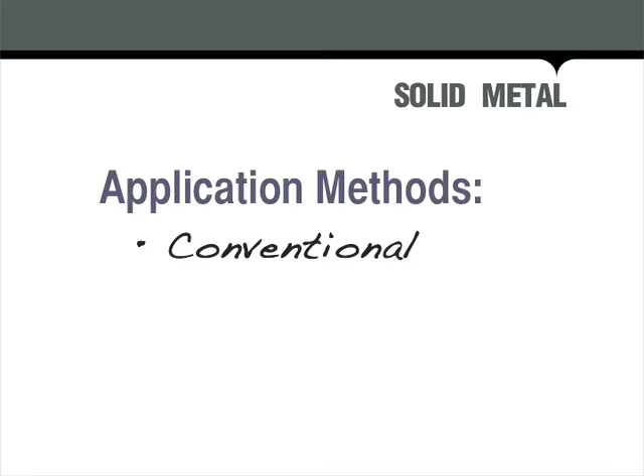Solid metal from Scuffmaster is a spray-applied finish made up of two components, Metallic Coat 2000 and Ultra Clear Protective Clear Coat. To achieve its elegant finish, solid metal must be sprayed using conventional, HVLP, or an HVLP gun attached to a pressure pot and compressor, a system often referred to as a hybrid system. Solid metal cannot be applied using airless equipment.

For this video, we will be using the conventional setup. Instructions for HVLP and hybrid applications can be found on our website, scuffmaster.com. Please note that while the equipment may change, the application technique will be the same.

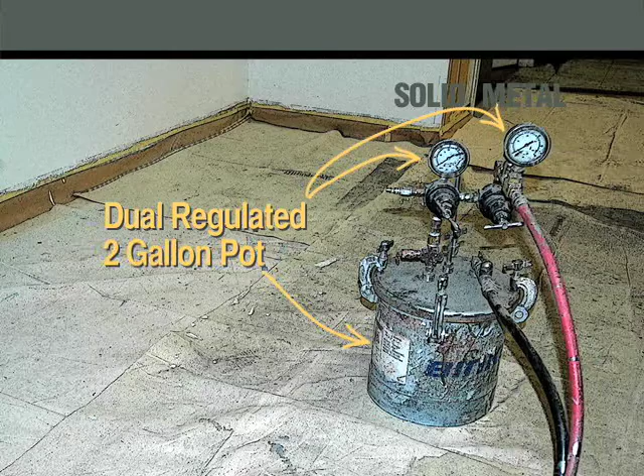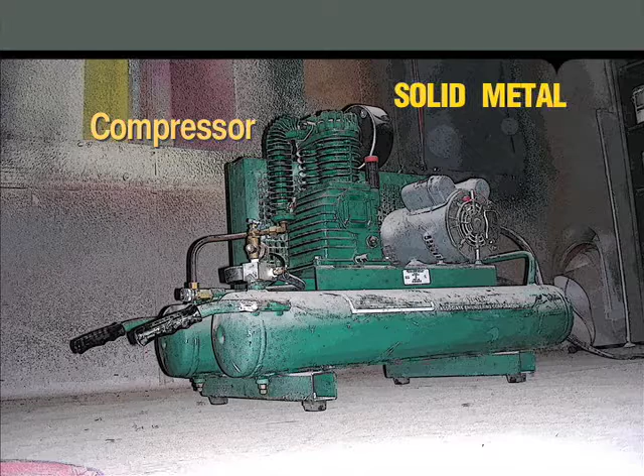For the conventional application, you will need a dual-regulated 2-gallon pressure pot, a Binks 2001 spray gun with 66 SS fluid nozzle and 565 needle, 63 PB external mix air cap. Another option is the 66 SK. A compressor that will provide at least 6 cubic feet per minute at 90 psi.

In your shipment, you will receive the two paint components, the MC2000 and the UC Protective Clear Coat. The clear coat comes in 3 sheens: flat, satin, and gloss. The most common sheen is satin. In addition, each gallon of metallic and each gallon of clear coat will come with a catalyst called MasterLink. MasterLink is a performance additive that is mixed into the paint just before application.

A word of warning: once the MasterLink has been thoroughly mixed into the paint, it has a shelf life of 36 hours in the can, but only 8 hours under pressure. Make sure you only catalyze the paint that will be sprayed that day.

Before the painting begins, examine the surface. You want a white primed, smooth surface using either Scuffmaster Primer Sealer or our bonding primer. Please refer to the product specs for proper usage. Since solid metal is a reflective finish, the surface needs to be as smooth as possible. On new sheetrock, a level 5 finish should be specified. Be aware that any and all imperfections in the substrate will telegraph through to the final finish.

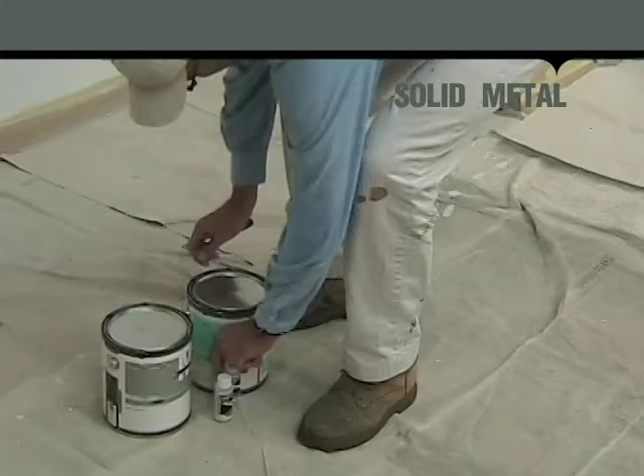The goal of this video is to make spraying solid metal as easy as possible. That starts with the proper setup. Scuffmaster finishes are made to order. This means they should be ready to go straight from the can without thinning. If, however, the metallic paint seems too thick, it may be thinned with water. Use the empty 2-ounce MasterLink bottle as a measuring cup. To avoid over-thinning, do not add more than 2 ounces of water at a time, and do not add more than 8 ounces per gallon total.

Add the MasterLink and mix thoroughly. This shouldn't take more than 30 to 45 seconds. Once the MC2000 is thoroughly mixed, use a nylon strainer bag to strain the paint into the pressure pot. This helps prevent the gun from getting clogged.

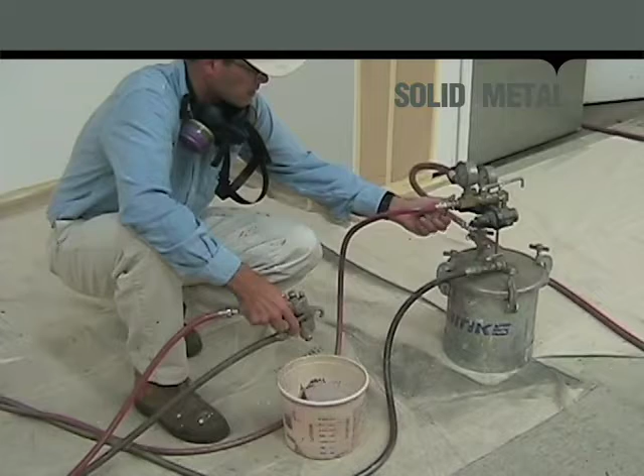Remove the air cap from the tip of the gun. Set the air and fluid pressure on the pressure pot to 0. Trigger the gun and dial up the fluid pressure. Increase fluid pressure until the paint streams approximately 4 inches before arching.

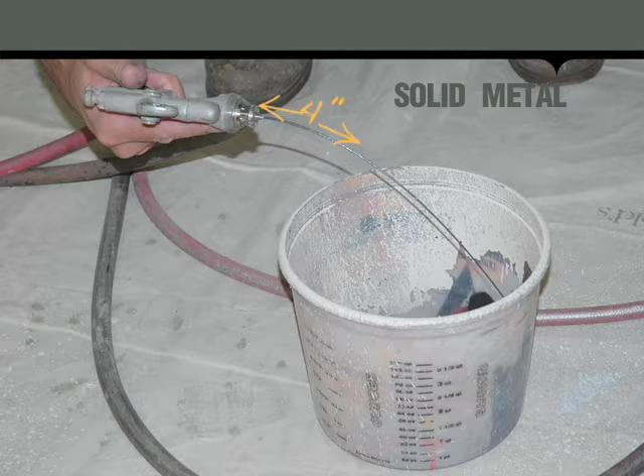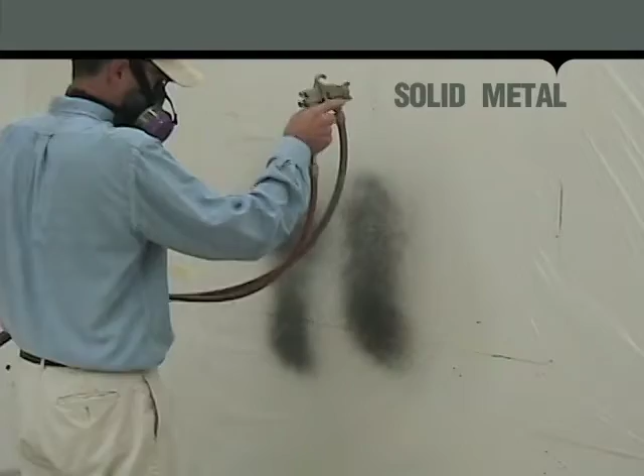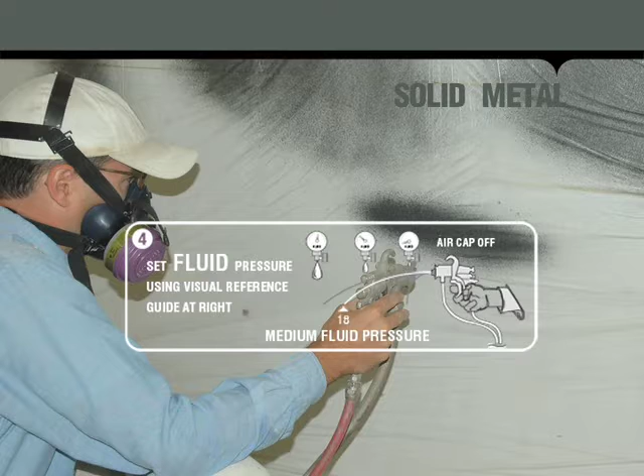Reattach the air cap. Slowly increase the air pressure until the proper spray fan size is achieved. With the tip of the gun approximately 10 to 12 inches from the surface, the spray fan should be about 10 to 12 inches wide. Make sure the fan is slightly under-atomized. By setting the pressures this way, you are using the minimum amount of air pressure to achieve the desired finish. Because factors such as temperature, color of the paint, and condition of the equipment can alter the pressure settings, this method will ensure fast and easy setup every time.

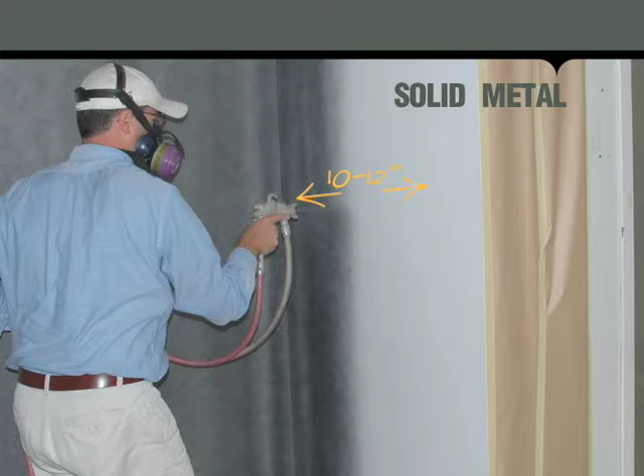The proper spray technique combines three components: the distance from the wall, the amount of overlap from one stroke to the next, and the speed of the spray stroke. Begin with distance from the wall. This will determine the overlap and the speed of the spray stroke. Hold the gun about 10 to 12 inches from the wall. If the tip is closer to the wall, you will need to use a tighter overlap and a faster spray stroke to compensate. Next, the overlap of each spray stroke should cover at least 50% of the previous stroke.

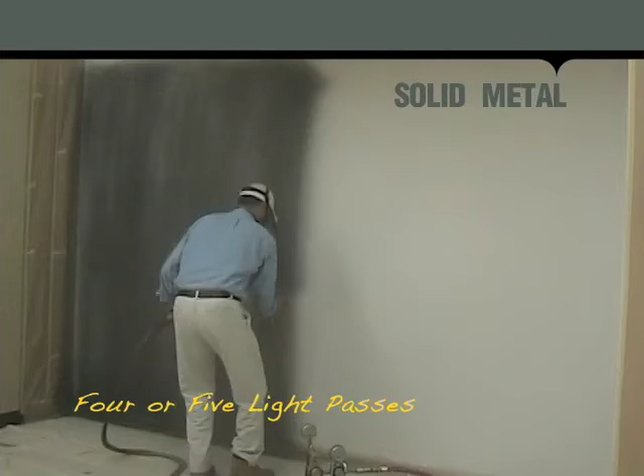Last, the speed of the spray stroke will determine how fast the finish will fill in. Avoid spraying too slow. This will result in a wet edge and will lead to striping. The fastest way to spray solid metal is to apply the MC2000 in 4 or 5 light passes. This may seem like more work, but light passes are applied more evenly and the finish will dry faster. This means a shorter amount of time between passes, and it usually means a better quality finish that requires less time spent fixing application issues later on.

Ready? Okay, let's do it.

First pass. The primer will still be visible. The finish may look cloudy or striped. Second pass. Follow the same vertical pass as the first. Ignore any striping, don't worry about trying to fix it at this point. Maintain the proper speed. Third pass.

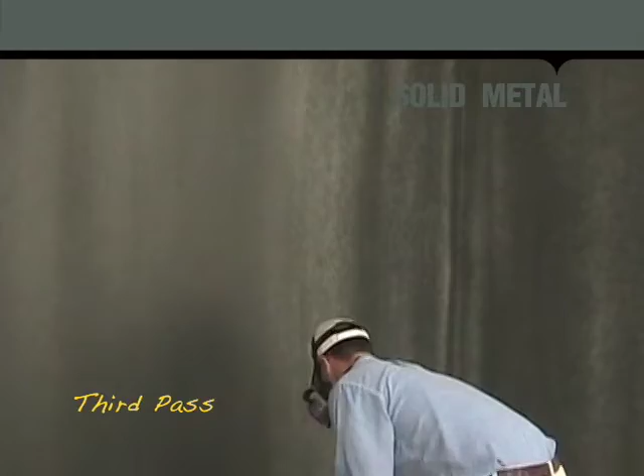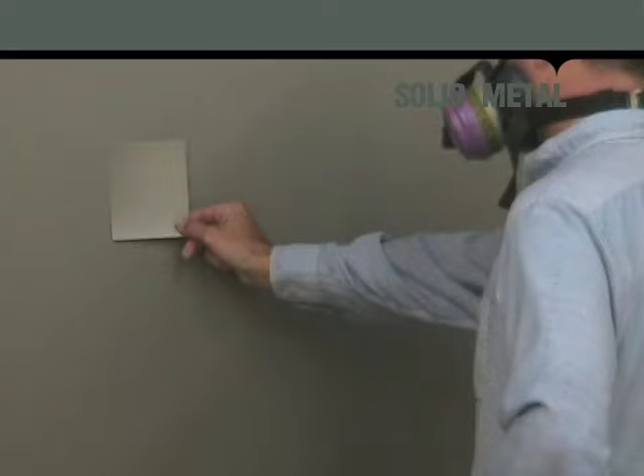The finish will begin to fill in at this point, although there still may be some striping and cloudiness, and some of the primer might still show through. Stop after the third pass to examine the finish from a couple different angles. At this point, the finish should look the same, regardless of the angle. Fourth pass. Use the same technique to finish. Fifth pass. Apply a fifth pass only when needed to provide a uniform finish.

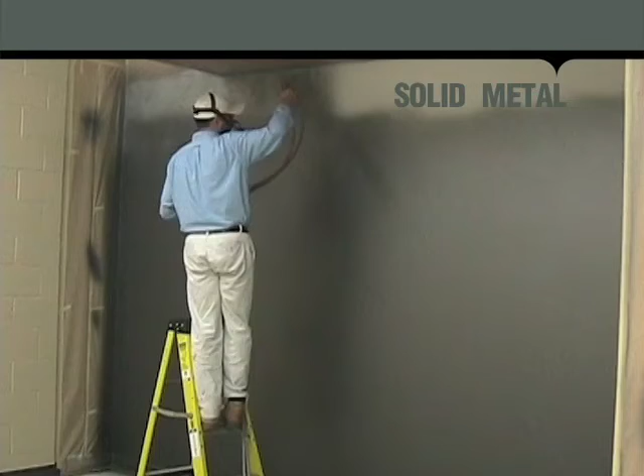It is important to work only within your reach. This means you might have to go back and fill in areas. Do this after completing the initial 4 to 5 passes. Again, 4 to 5 passes, fill in until complete. Before cleaning the equipment, check the surface from multiple angles to determine if the finish is indeed complete. If it looks good from one angle, but not another, it is not done and will need additional light passes.

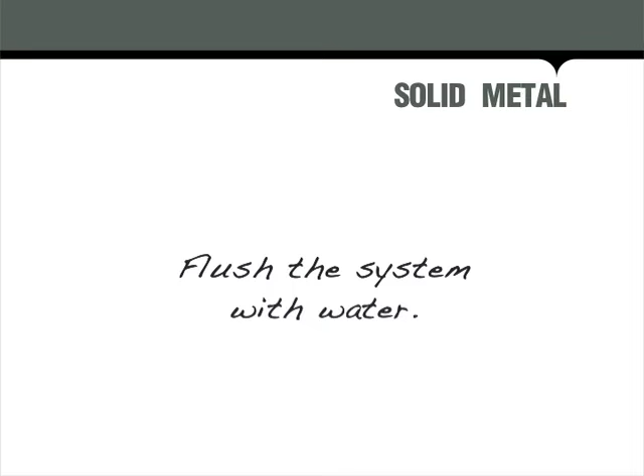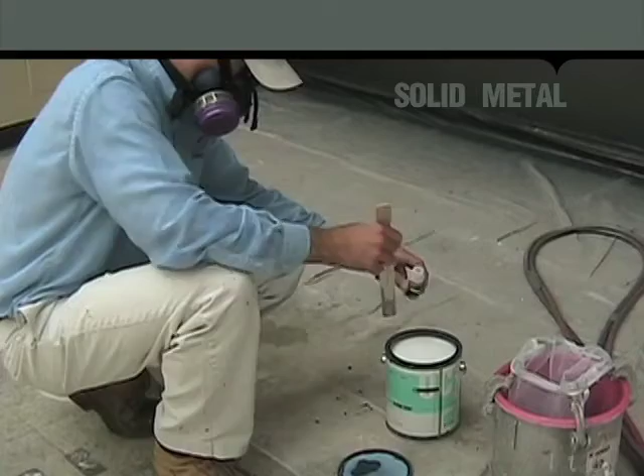Clean the equipment with water as soon as the metallic step is complete. Make sure the system is rinsed clean before proceeding to the next step. Next is the Ultra Clear Clear Coat. Add MasterLink just prior to application. Strain the clear coat into the pressure pot.

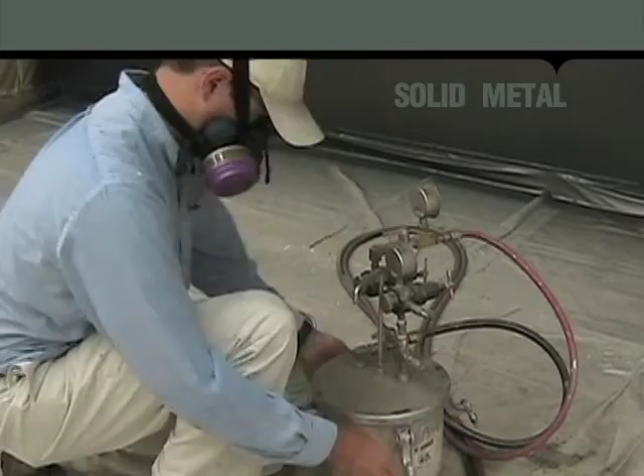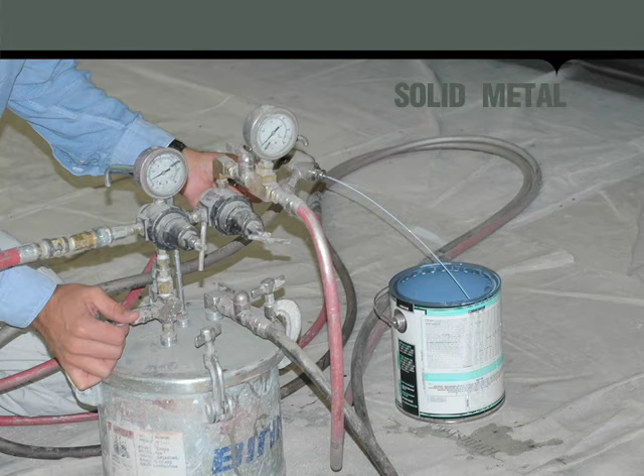Use the same technique of setting air and fluid pressure as you did for the metallic base coat. Once a 3 to 4 inch stream of clear coat is achieved, add air pressure until it is slightly underatomized. Unlike the metallic coat, spray the clear coat in one pass. Maintain a 50% overlap and a wet edge. The clear coat will go on milky, but it'll dry clear.

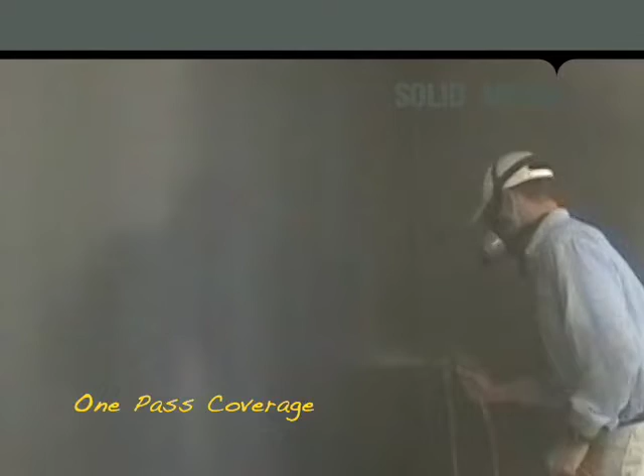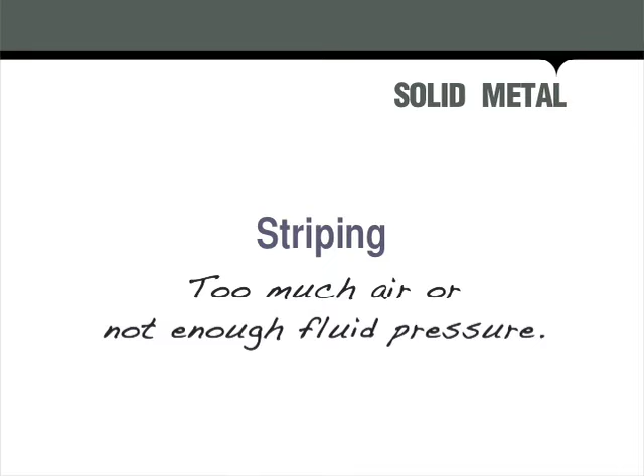Before cleanup, double-check the finish one last time. If you followed the instructions, you should have an even finish. But if you see striping, this is typically caused by spraying too slowly. The metallic paint builds up too fast. Spraying with too much air pressure or not enough fluid pressure. This will narrow the spray fan as well as result in too much overspray. This also will require more than 4 to 5 light passes.

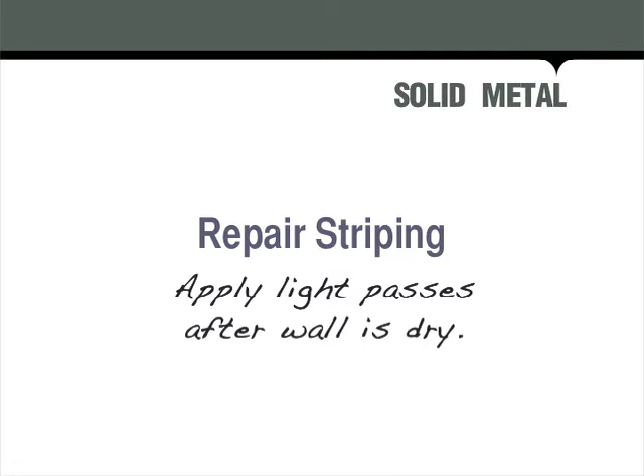Spraying too close to the wall. The closer to the wall, the more narrow the spray fan becomes. To fix striping, wait until the surface is completely dry and apply light passes until the striping has disappeared. Do not try to cover the striping with a heavy coat of paint and do not use a crosshatch spray stroke. If you see texture, this is typically caused by spraying too far from the wall.

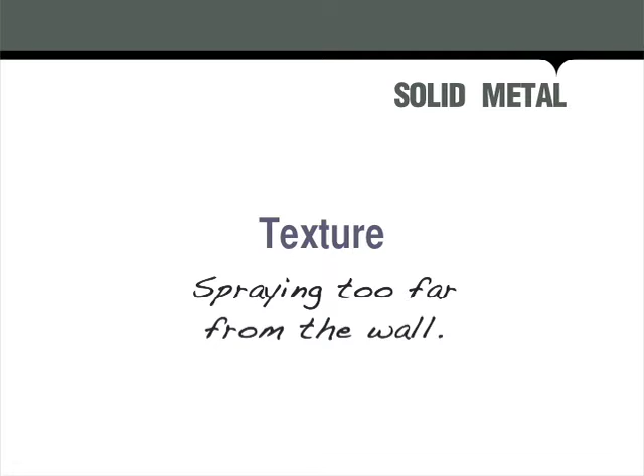The paint dries before it hits the surface and doesn't dry smooth. Spraying with the air pressure too high. This will dry the paint before it hits the surface. Bad spray technique. An arcing spray stroke where the distance from the gun to the wall changes. This is most noticeable in corners and near the floor or ceiling.

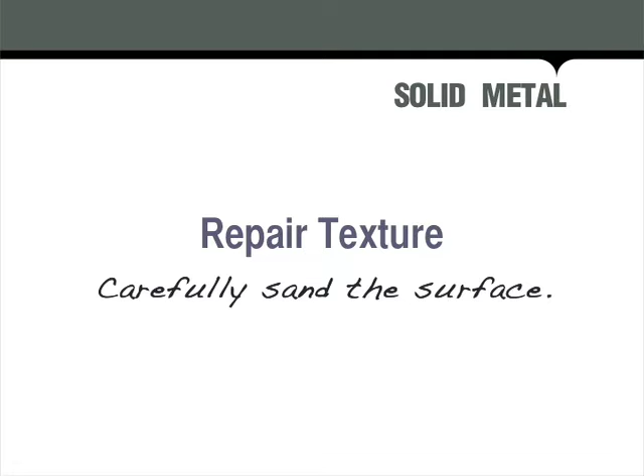To fix texture, carefully sand the surface smooth using a 220 grit sandpaper. Avoid scratching or gouging the surface. Once smooth, remove sanding dust. Then apply light passes until the finish and color are consistent. Be sure to use proper technique to avoid reapplying a texture.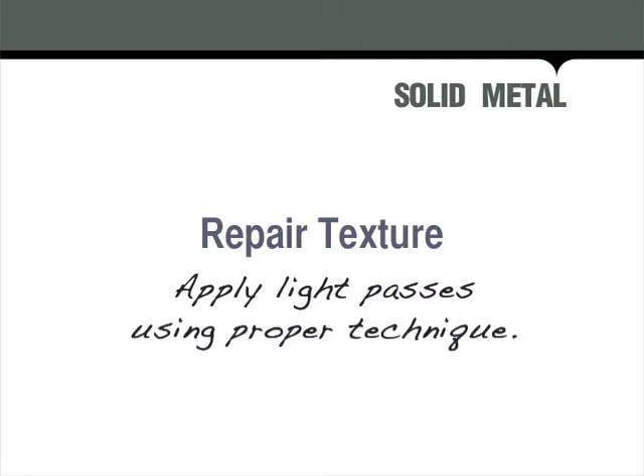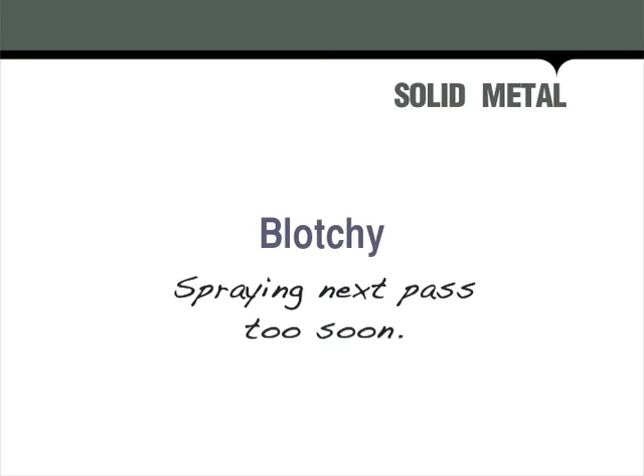If you see a blotchy or cloudy area, this is typically caused by spraying the next pass before the previous pass is dry enough. The next pass re-wets the previous pass and can cause a color variation. Spraying too slowly. Paint can build up too fast. This may result in striping, but can also take on a blotchy appearance.

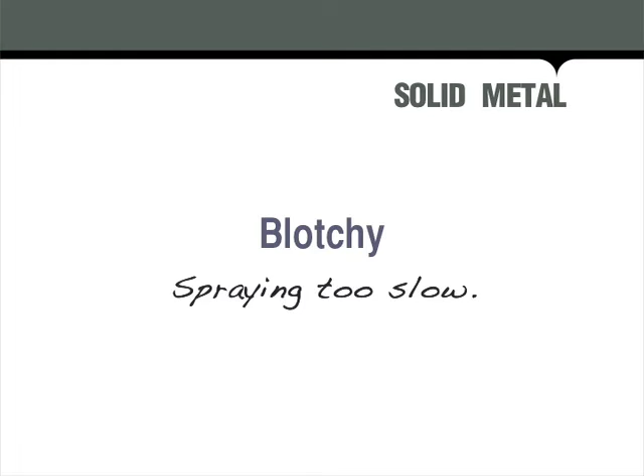Using a tinted primer that is too close to the finish color. A tinted primer makes it difficult to tell when enough metallic paint has been applied. To fix blotchy, cloudy areas, the procedure is similar to fixing striping. If the surface is smooth, spray light passes until a uniform finish is achieved.

As with every Scuffmaster product, Solid Metal is a water-based finish. This makes cleanup a breeze. Flush the system with water, clear the lines, clean the air cap and gun, and you're done. If you have product left over, please dispose of it according to local regulations. Once the MasterLink is added, the shelf life of Solid Metal is less than 36 hours, so storing it for later touch-ups is not an option. But if you have leftover paint that was not catalyzed, it can be stored for later touch-ups.